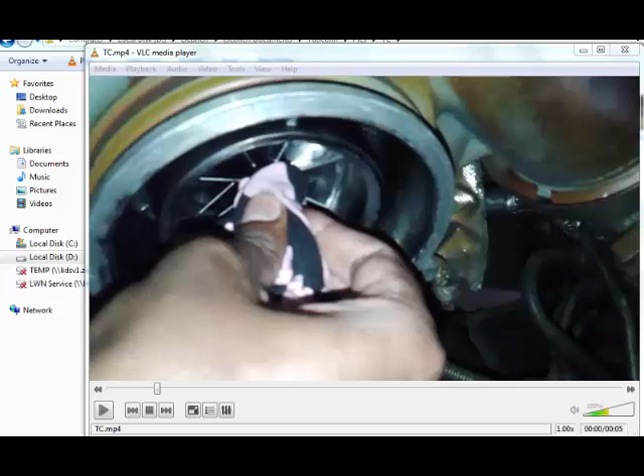Hi friends, today we will see something about how to check a bearing play in the turbocharger. Let us watch this video first.

What you see, there is a certain amount of play in this turbocharger. Do you think it is normal? It's perfectly normal.

Because in most of the conventional turbochargers, we don't have a ball bearing, we have a floating metal bush. So there is always a certain amount of play in this bush. Once the engine is started and oil flows, it creates a thin layer of film between this metal bush and the shaft, and it acts as a bearing. So this kind of play is okay.

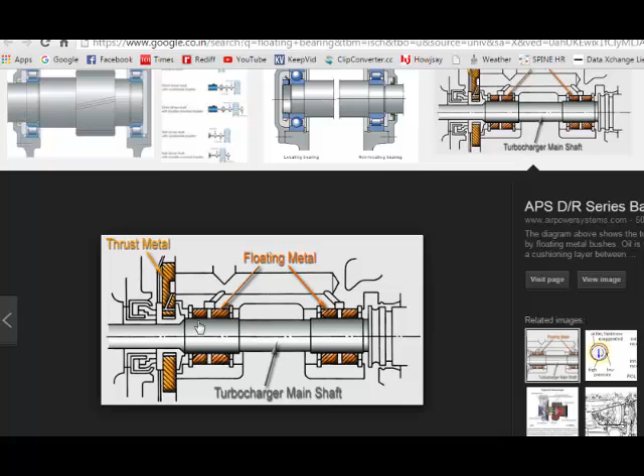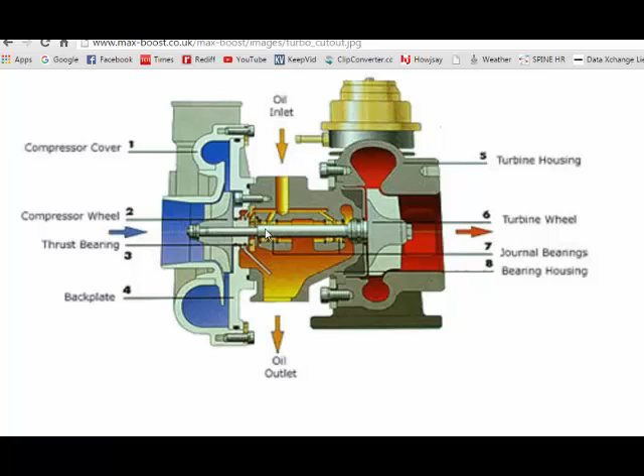We also have another picture. So here you can see a cutaway section of a turbocharger, and the yellow thing is the oil. Once the engine is started, oil flows inside, and it forms a thin layer of film between the metal bush and the shaft. So this oil acts as a bearing, what we can call a floating bearing, in other words.

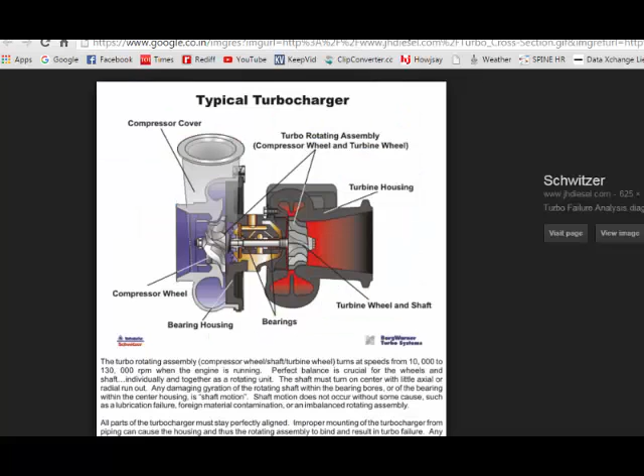But the new turbochargers, they have a ball bearing, the thing like this. So the new turbochargers having these ball bearings have a better performance than this metal bush, which has a floating metal bearing.

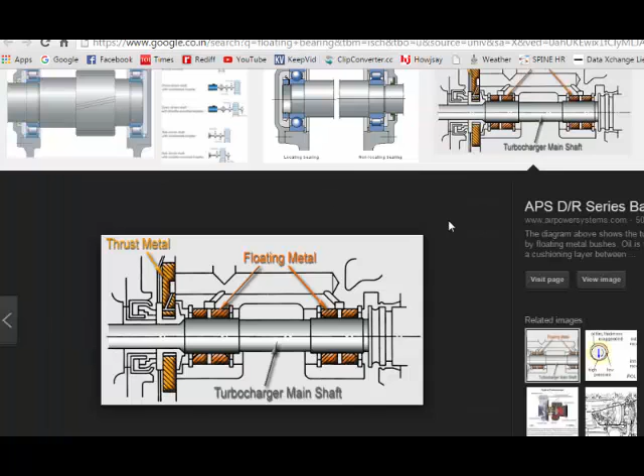So I have another picture. So here you can see this. There is a thin layer of oil film between the metal bush and the shaft, and the turbine shaft. We have other videos, you can see some other pictures also here.

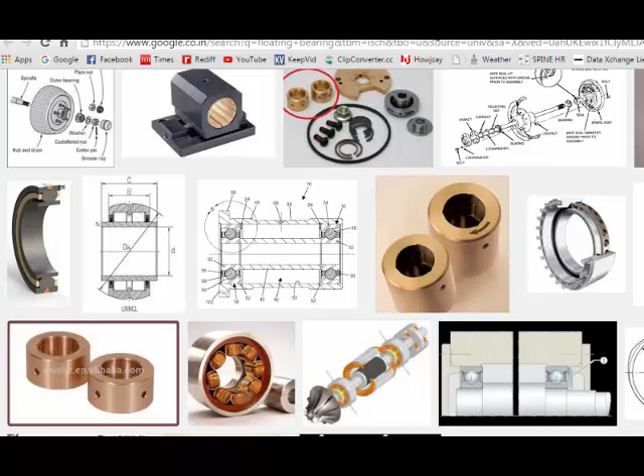So that's it. This certain amount of play, the small amount of play, it's okay, unless the turbine or the compressor blade touches this concentric casing. Till that point it's okay.

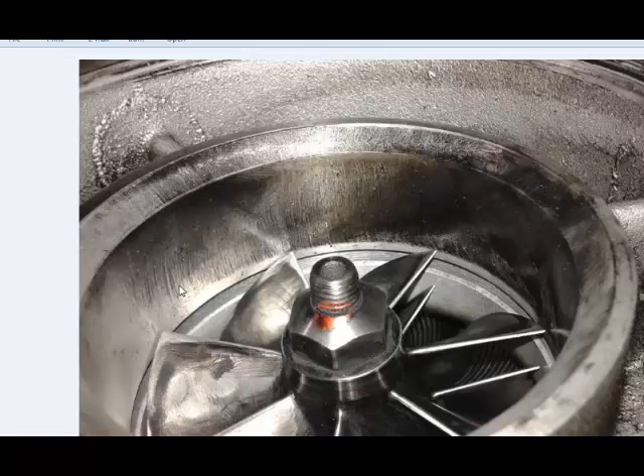So have a look at this compressor side of the turbocharger. Here we can see the mark that the blade has made in this turbocharger casing. So this is the starting point of the trouble. This mark indicates that the blade is rubbing on the casing.

So sooner or later it's going to fail. The blade is going to get damaged, and it will reduce the charge pressure, and thereby the engine performance, the power of the engine. So when we open the compressor side of the turbocharger, and if we see a certain amount of scratch mark like this, that is a good indicator.